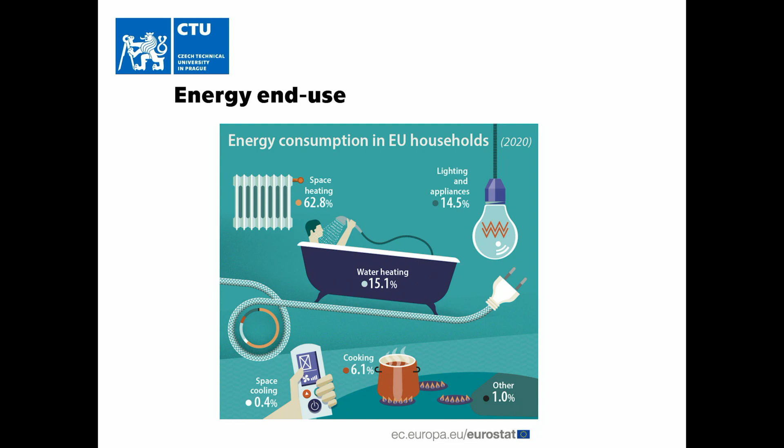I think it's necessary to note that, in terms of energy, we use a lot of heat just for space heating and water heating. I borrowed this picture from Eurostat - it's a bit old, but it's a good representation that we use something like 75% of energy for heating. So there's no such problem with electricity for households. But for space heating, in terms of decarbonization, you can switch to heat pumps, which will increase electricity consumption.

But for district heating, I think it's good to say there are other options. We are here at the World Nuclear Exhibition, so one option will be nuclear.

Something about district heating in Europe. Usually we say that in Eastern Europe there is a quite developed district heating system. You can see in Germany there is more than 90 gigawatts thermal capacity for district heating, which nowadays might not work at full capacity because of improvements in efficiency. But there are also other countries like Poland, Czech Republic, Slovakia, and northern countries like Finland or Sweden.

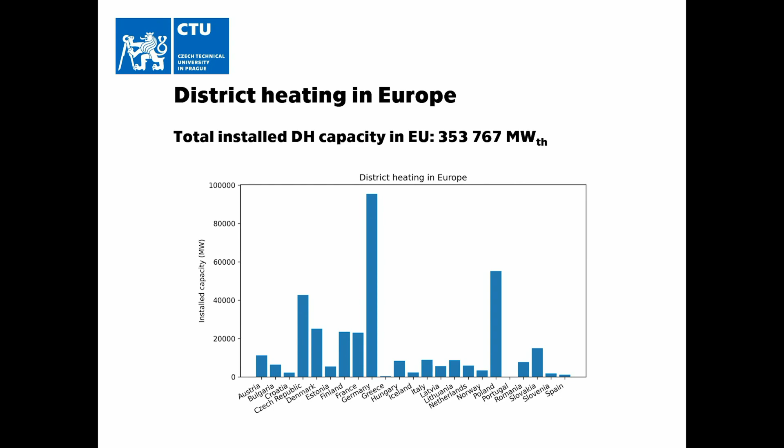For the eastern countries, we are usually burning coal, now we're burning gas, so it's a heavily carbonized sector. As you can see, the total capacity is 350 gigawatts thermal, so it's a huge amount we should decarbonize.

One of the largest projects for district heating is Zaporizhzhia. If you take a look on Google Maps nowadays, you can see there are a lot of greenhouses nearby Zaporizhzhia which are using heat from the nuclear power plant. So it's not only heat for industry, not only heat for the district households, but you can also use it for agriculture.

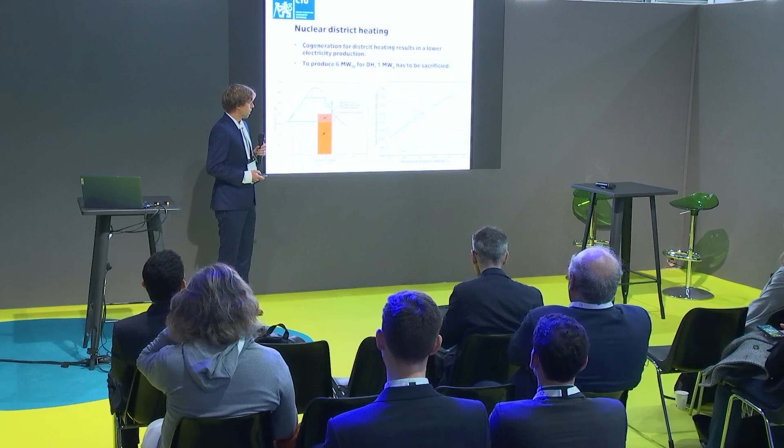But let's be honest, it's not for free, because what is the output temperature from a normal nuclear power plant? It's something like 40 degrees Celsius. So you can't heat your home from this kind of low heat - you have to sacrifice something.

Typically you insert some connection between the high pressure and low pressure turbine, so you need to sacrifice some amount of electricity. It depends on the temperature you need for your system - if you have a modernized system with low temperature district heating, it's not necessary to sacrifice as much. But still, to produce 6 megawatts thermal, you need to sacrifice 1 megawatt of electricity.

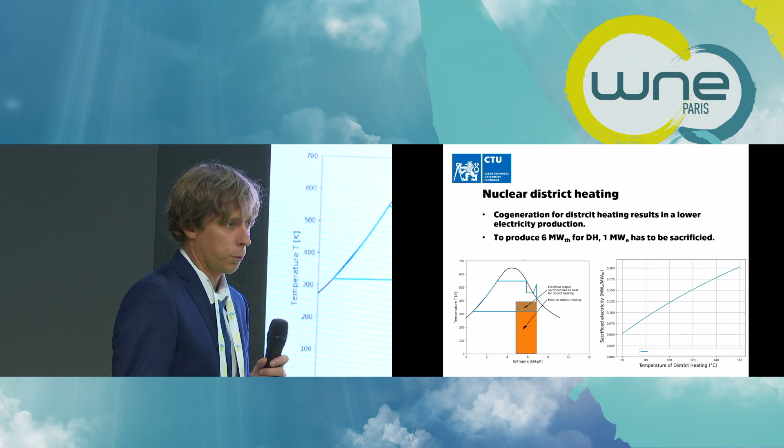So you are losing something - there's additional cost you have to account for if you want to use heat from a nuclear power plant. It's not just about including the piping to connect your nuclear power plant to the system, but you also need to include the sacrificed loss of electricity. But still, it might be economically viable, and you can see that it is - it was in the past, and it is also nowadays.

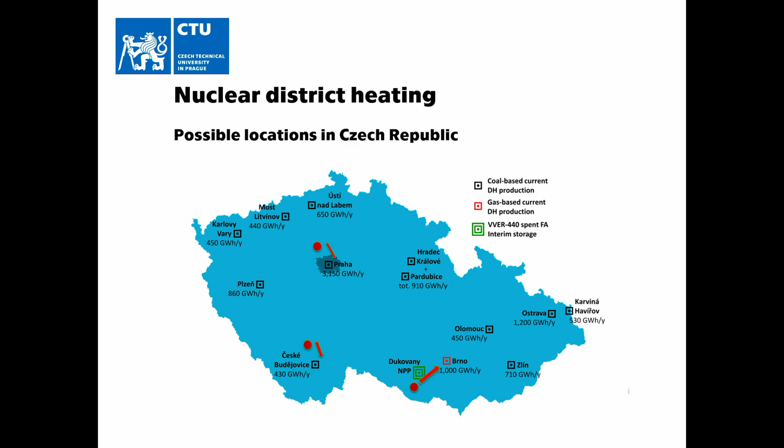How is the potential in Czech Republic? There are some locations in Czech Republic, usually with higher consumption, where it's economically viable to build connections or think about building nuclear reactors there. I put some dots showing Dukovany nuclear power plant for future connections to Brno, and Temelín for České Budějovice.

However, the main district heating system is in Prague, which is something around 3,000 gigawatt hours per year. I'll show you later some case studies with it. There is great potential in Czech Republic, but also great potential in Poland, Slovakia, and other countries like Finland, which are also looking at heat from nuclear power plants.

I'm from the Czech Technical University, and we are working on our own solution to provide heat from nuclear. That's our heat-only reactor, Teplator, which is just 'heat' and 'reactor' put together in Czech language.

We started as a university project at the Czech Technical University in Prague and the University of West Bohemia, something like 4 years ago, and we've taken quite a good path, developing our project further. What's kind of unique in our project is that we are focusing only on heat.

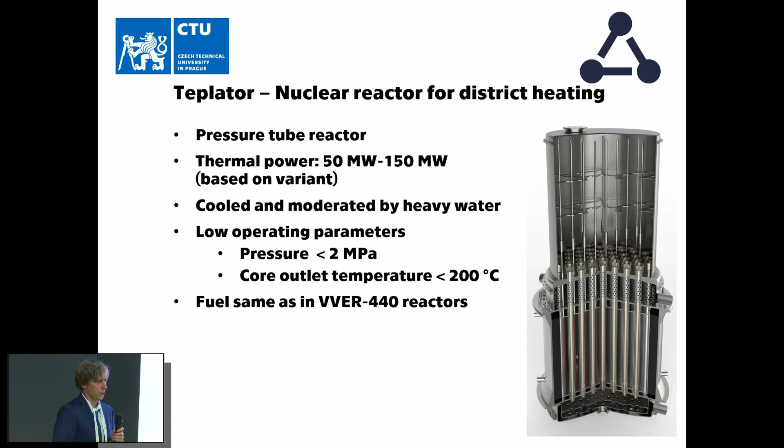So we don't need special Gen 4 reactors with high temperature to produce hydrogen, because we only need heat around 130 degrees Celsius. It's not necessary to go to higher temperatures, which corresponds to higher pressures. So we use low operation parameters, which means our reactor will be cheaper, because you don't need to cover all that pressure and so on.

It's also quite unique that we are using already licensed fuel, the same used in Dukovany from the VVER-440 reactor, and it's a heavy water reactor. The idea started as using fuel from Dukovany that was removed from the reactor, since there is still some reactivity we can extract, but in our concept with low parameters and using heavy water.

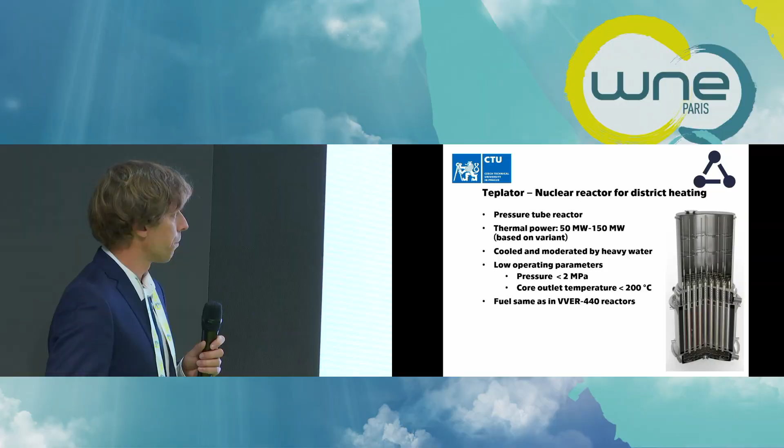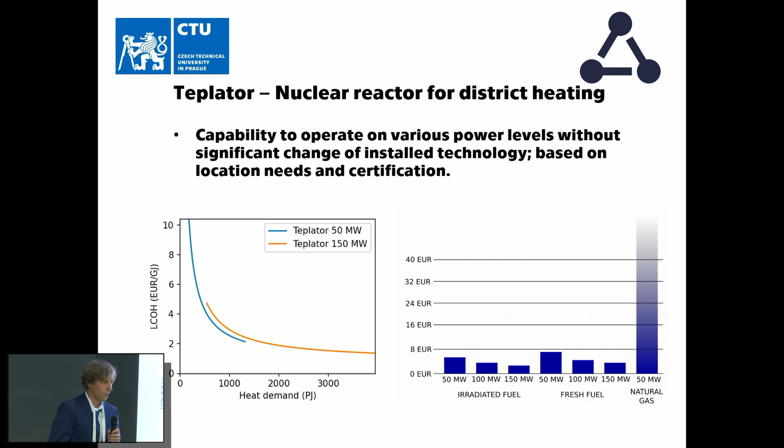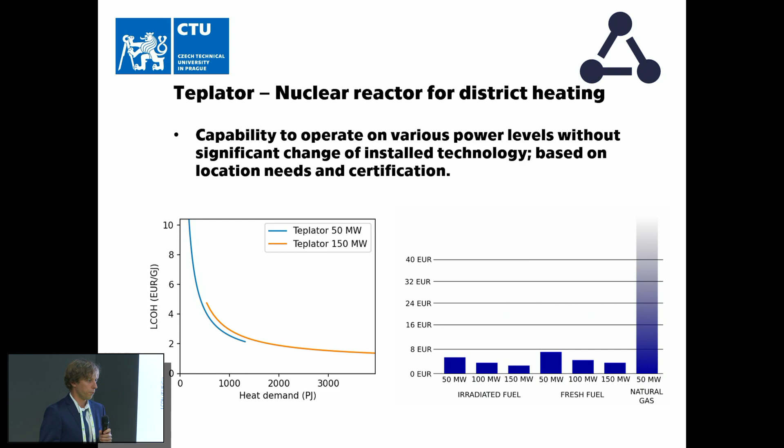It can be cheap, but it's not like electricity, because heat demand changes during the year. During summer there isn't much heat demand, since you only need water to wash your hands or take a shower, not a heater at home, but you need to cover the winter too. So the price will differ for different situations and locations, and we are thinking of having more variants than just one, to cover smaller and larger cities.

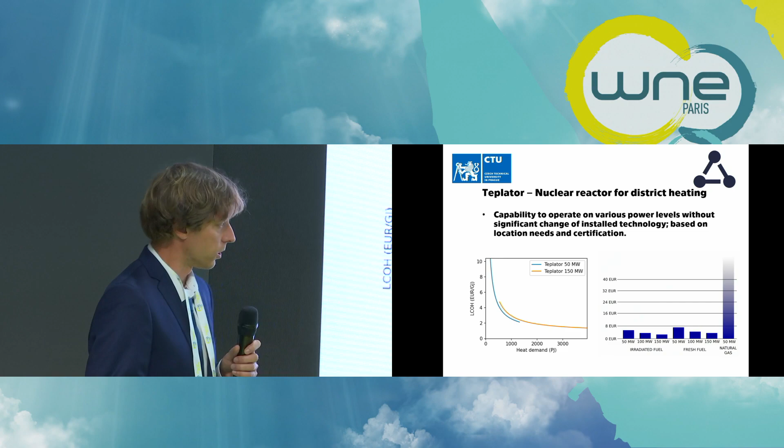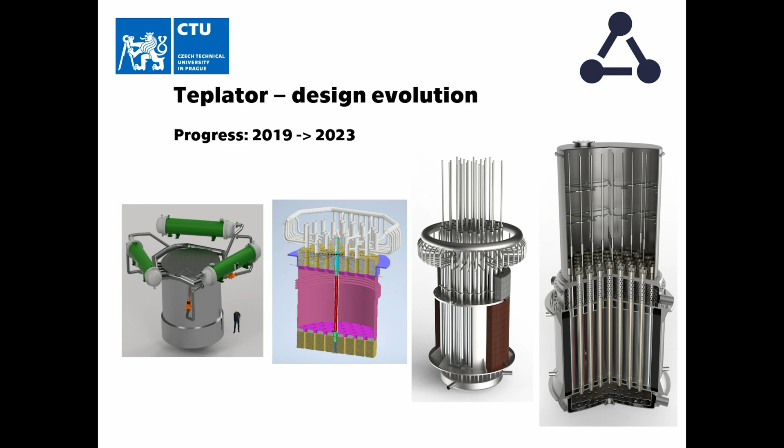This is just an image of what our path was. First came some CAD models, and on the right side is one of the latest designs we're allowed to publish. So we took some path, making changes in design.

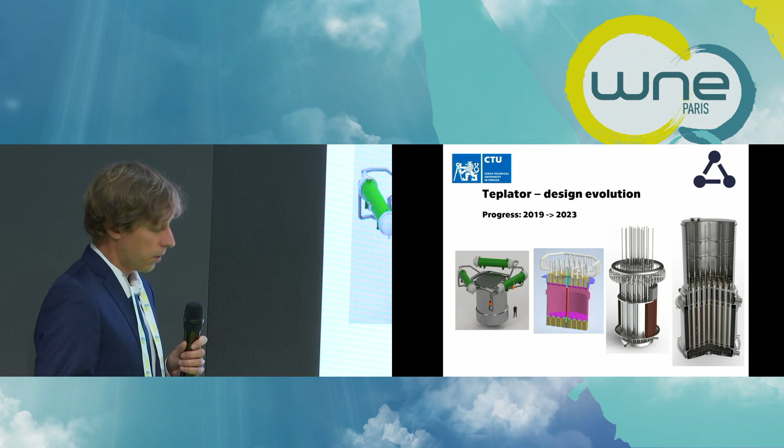As one of my colleagues said, we shouldn't sell our reactor like we would sell a car by just showing the engine—it's better to show the whole car. So we collaborated with an architect who designed the building and surroundings. It was interesting that this was, I think, the first public award for architecture related to nuclear. It won a public award and also the award of the National Center for Construction this year.

What are our future steps? We don't want to just do scientific research and improve our reactor—our primary goal is to license it. So nowadays we are taking steps toward licensing, finalizing the basic design and moving to detailed design. We've also established cooperation with Ukraine, so we have a potential location in Slavutych, and work is underway toward possible deployment there.

To be honest, we know about the situation now in Ukraine, so let's be honest—after the war is finished, we can really start saying that we want to build it there.

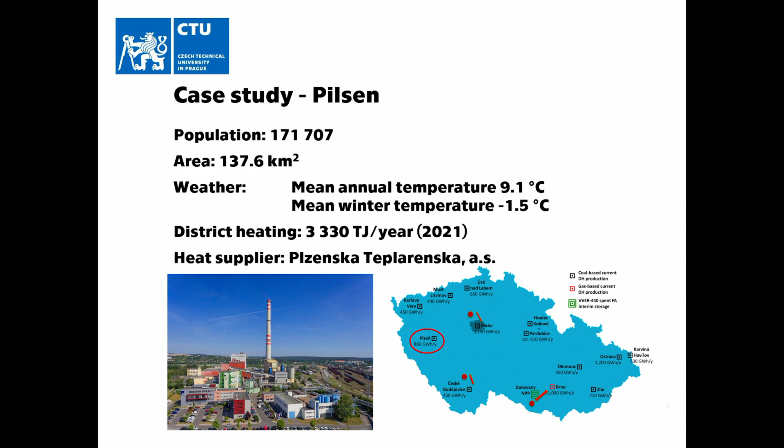So, something about the case studies we did, to see if it's economically viable. One of those case studies was for Pilsen. I'm not sure if everybody knows Pilsen, because it's most famous for the Czech beer, Pilsner Urquell. If you visit our Czech pavilion, you can taste beer from Pilsen. Also, for nuclear, there are some companies there like Škoda JS and Doosan. So it's a well-known city in the nuclear field, and now its heat is provided by the district heating station.

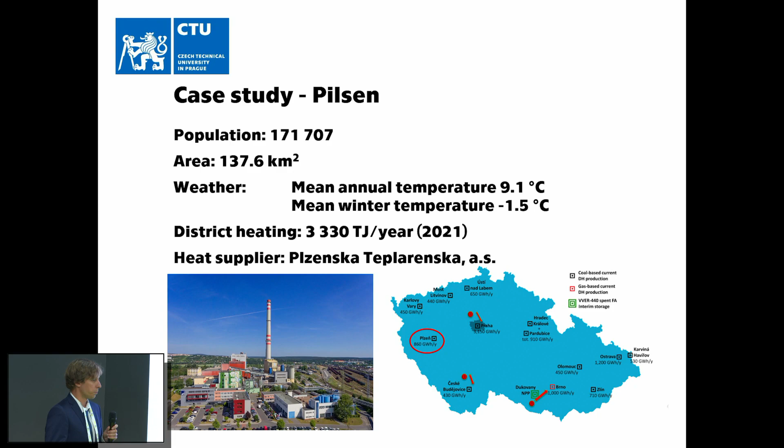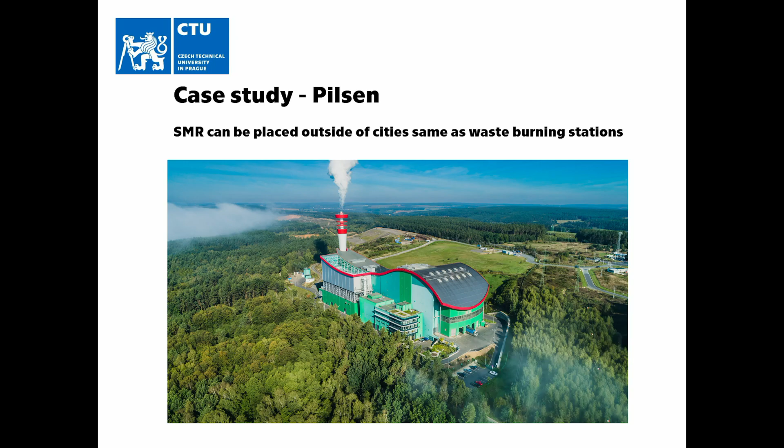This is the waste burning station, newly built, and I'm using it as an example because, speaking about SMRs, I don't think it's necessary to deploy them right next to the households where there's a close connection to the district heating system. We can build it somewhat further away, as they already did for the waste burning station, for the same reason - you don't want to watch the chimney of this kind of building or see tens of trucks running with waste to the station. So I think that's the way we can approach it.

It's not necessary to directly place the SMRs at the locations of the current district heating plants - we can build them outside of the city. From nuclear projects, we know that we can build it like 20 kilometers further away.

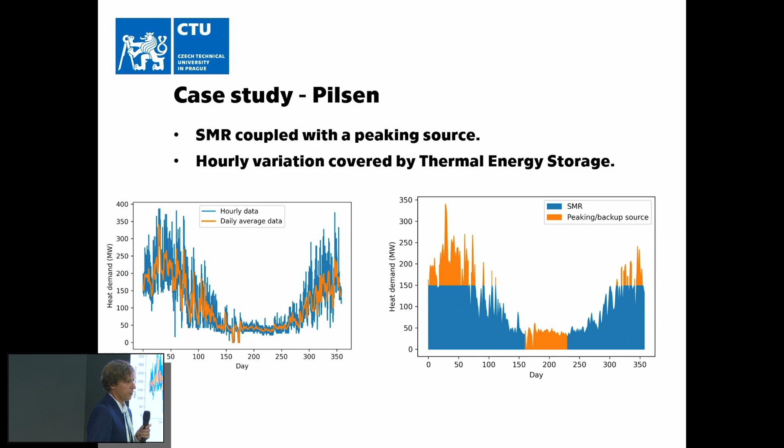And how it looks about the heat demand - as I said, it's different during winter and during summer. So there's an example for a city like Pilsen. On the left side you can see different heat demand, and on the right side there's just a graph where I try to represent that you don't have to cover the whole heat demand from one source. You can use another source, especially for nuclear, where you have an outage, so you still have to cover your heat.

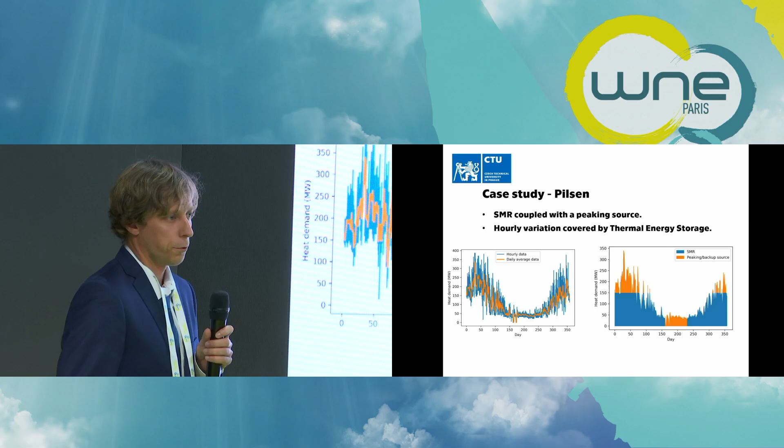So you can use another source, some peaking source. I would use some gas boiler, because the fuel is, let's say, more expensive than the capital cost to build it. So that's the thing - we don't have to use our reactor to cover the whole demand. It basically depends on the location and on the heat demand.

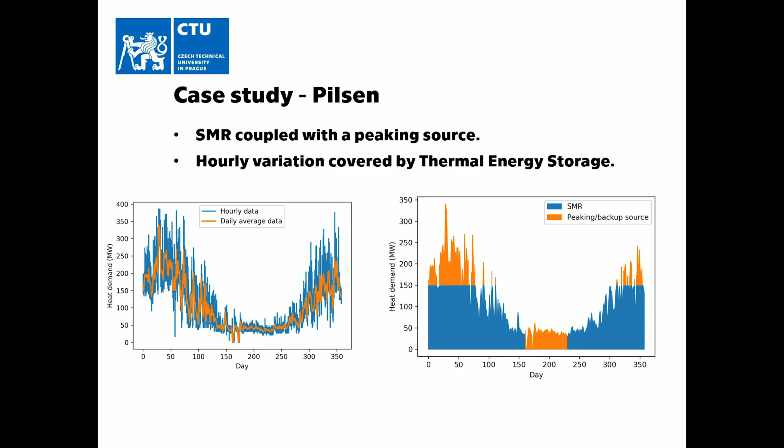And it's good to say that there's a different heat demand not only during the season but also during the day, as you have some morning peaks and some evening peaks. So you can use some hot water storage, some thermal energy storage, to cover those peaks. You can also use it to lower your additional peaking source requirement, so you don't have to build a bigger source - you can use thermal energy storage instead.

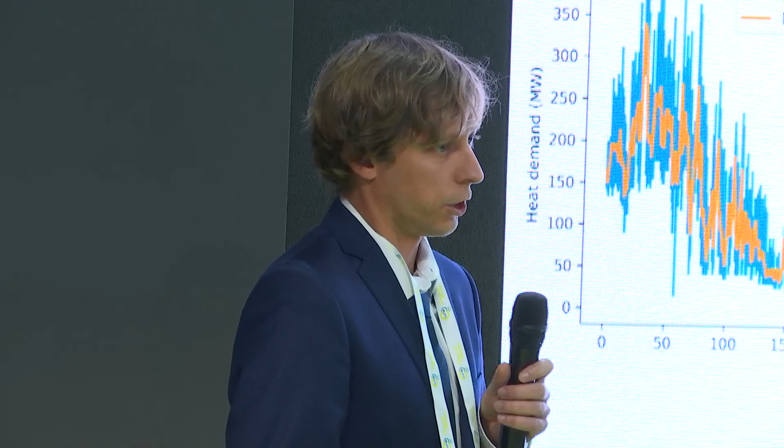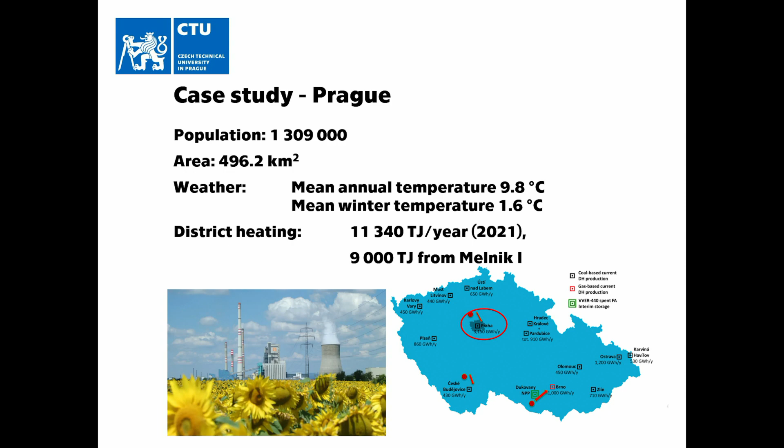And how it looks for Prague, because it's, let's say, one of the biggest district heating systems in Czech. Nowadays the majority of the heat comes from the power plant Mělník, which is located something around 20-25 kilometers away, and it delivers 9,000 terajoules out of a total 11,000 terajoules.

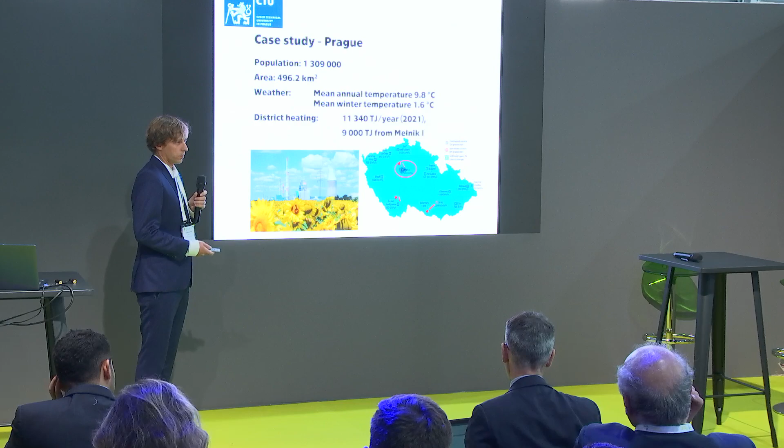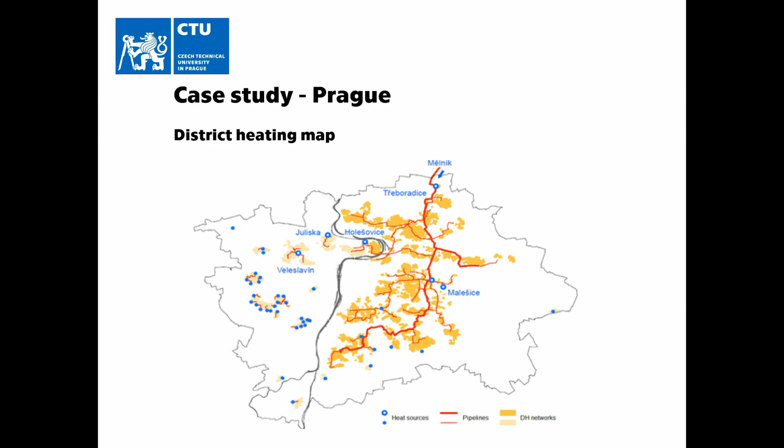So as you can see, it's not such a problem to use nuclear for district heating - you don't have to build it next to your home. This is just the map for the district heating. You can see that at the top there is a transmission line from Mělník, and there are some additional heating stations. There is also a waste burning station in Prague, in Malešice. So there's a quite developed district heating system already in place.

So I think it's good to think about covering this from nuclear - it doesn't matter if it's our solution, Teplator, or some other solution for small modular reactors. This was briefly about the situation in Czech, but you can see similarity in Poland and also in other countries with developed district heating systems.